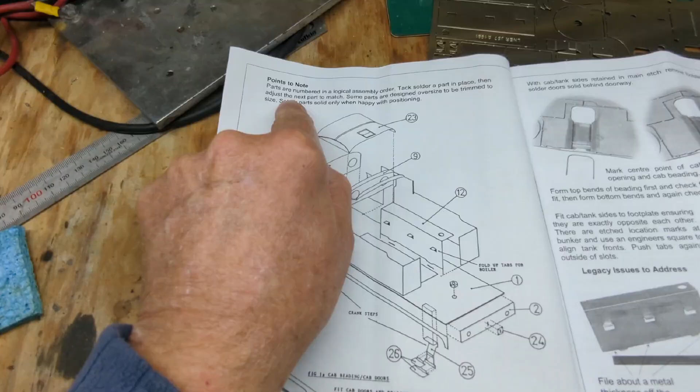Points to note: parts are numbered in logical order. Tack solder a part in place, then adjust the next part to match. Some parts are designed oversized to be trimmed to suit. Solder parts solid only when happy with positioning. Common sense. So they're like, you put 1, 2, 3, 4, 5, 6, and all that. So it's 1 till when you finish.

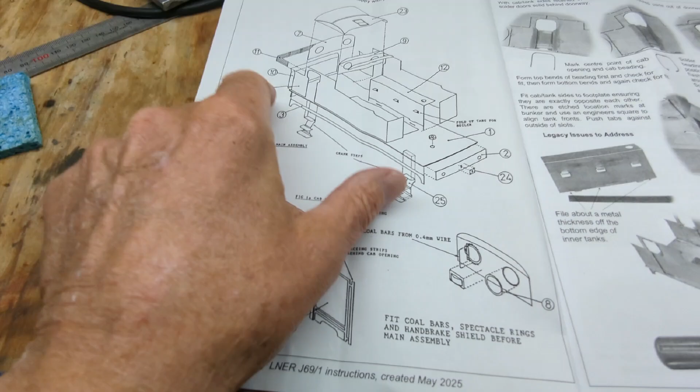Now, look, you've got part 1, which is a foot plate. Part 2 is 2 of those, the buffer beams. Part 3 is a valance. So even though it's only 3 parts, there's 5 of them, which I'm going to get out. You've got to put a captive nut in, front and back. But notice it jumps a bit, which is not a mistake. 10, 11, 7. Then all of a sudden you get to 23 and you think, where's all the rest of them? Well, you still follow it. This just shows you don't put the cab roof on now.

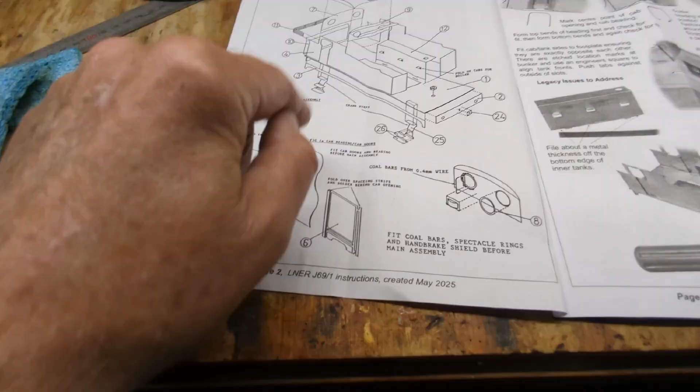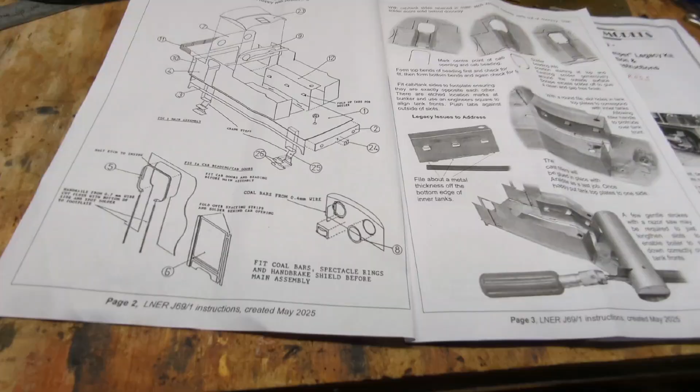So, for instance, part 4, then you go part 5. So this is put on in the flat, around the tank sides. 8. So it continues on. So just put them in the order you find them. That's the best way. I mean, if you look at the cab roof, and I've mentioned this before, I think this is a good touch. Where is it?

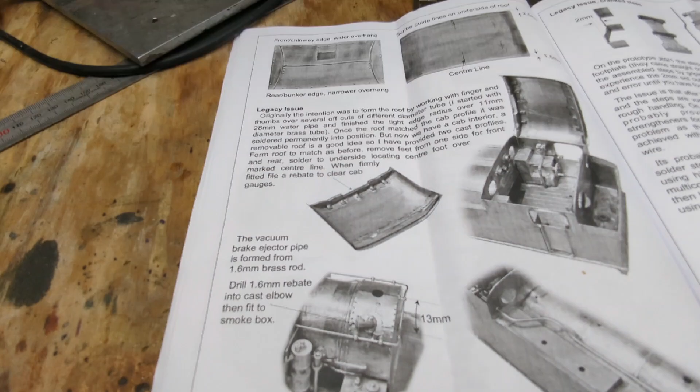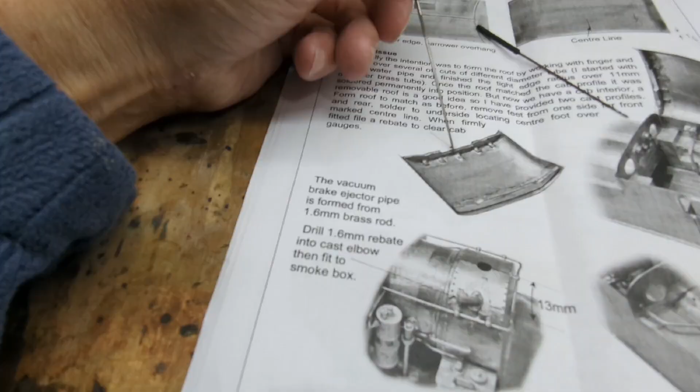Cab roofs on tank engines need to be removable, because if you solder it on, then you've got the problem: how do you paint the thing? So what Jim has done, and I reckon it's really good, let's get a pointer, he's provided 2 white metal formers to the shape of the cab roof, which will match here and there. They're soldered in on lines there.

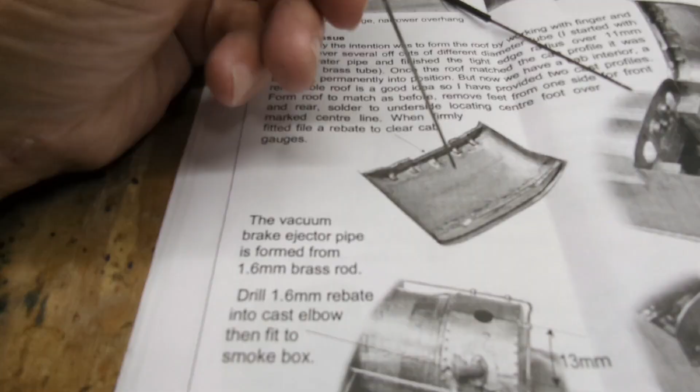So what happens is this should be a good press fit. So the cab should sit on, there should be no daylight. That's the plan. I really like that idea. Good one, Jim. Yeah, love it. So what I'm going to do today, I've got two of the frets out.

These parts will all be cut out and put back in the box. There's a foot plate, that's 1. Now, 2 and 3 are on the chassis. So we've got parts 2, that's the buffer beams, and we've got parts 3, which is, hang on, I've got to look now because I'm trying to do this. Where is it? There's part 3, and there's another part 3 here somewhere. I've just seen it. Hold on. Part there.

So I've got all of them. That's it. So here's the parts I need: the foot plate, the valances, 2 buffer beams, and 2 captive nuts. I need to clean all this up first and solder them in. There's the parts I've got out the middle of the foot plate, 2 steps, and the spectacle plates front and rear. So that's the frets I've got left. They can all go back in the box now.

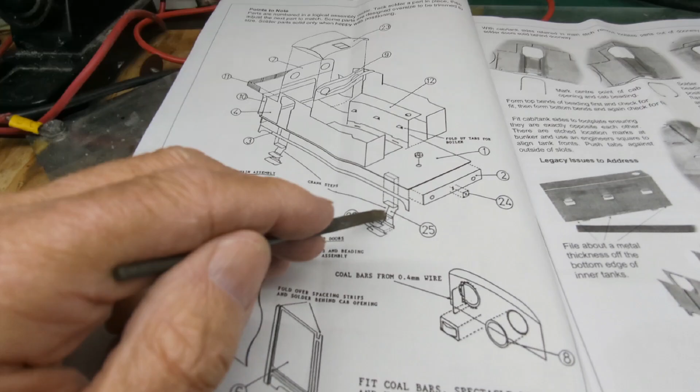Now, something to think about is this. Yeah, you could put these steps on. You could put them all on now. Big mistake. That's why he's got it 25 and 26. If you put steps on now, I can guarantee it, you're going to bend them, because steps are pretty fragile. Steps are probably one of the last things you want to put on a loco, because as soon as you put it down, you buckle them, they bend and they break.

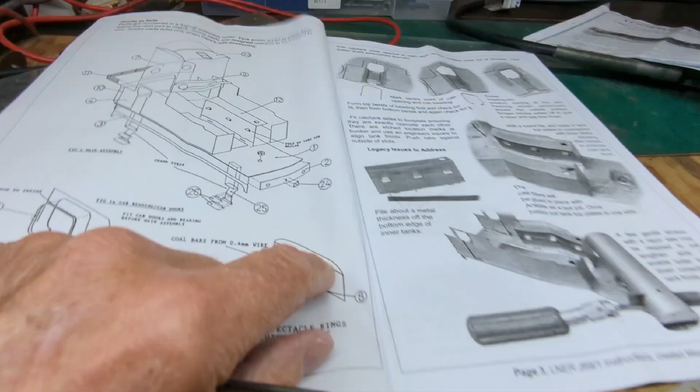If you haven't built a kit before, you wouldn't probably know this, but anyone who's built a kit, including me, will say, don't put them on. They're just in the way. So there you go. So I've got all these parts. So I've got to clean this up, solder on the captive nuts, and just add all this on. Now, the other thing I've got to make sure of, I think these are, this will go, you can see, I think the hook will go slightly towards the bottom. So you've got to be careful which way you put these on.

Now, there's various ways to cut frets out. You can get fret cutters, all sorts of manner of stuff. What I've got, these are old naff, cheap, nasty, horrible Chinese, well, it doesn't matter. They're not good needle files. You got them from a pound shop or a $2 shop. But you file them up, and they're good for a couple of things. One, they're good for scraping solder off and stuff like that. But basically what I do is I put it on here, put it down there, and tap with a hammer, and out comes the part.

Like everything, you want to make sure you don't distort parts. If you do, I've got these. This is from my old telephone days here in Australia. These are called duckbill pliers, and these are probably 60, 70 years old, maybe. Good quality stuff, made in Sweden. They're used for wiper contacts and relays. But I've kept hold of them, and they're great.

I'm in the laundry now, so I've got some Barkeeper's Friend. There's other products you can use. What I want to do, this is the foot plate. Obviously that's tarnished a bit, so I'm just going to clean this up. I think Vical has various products you can use. So I'm just going to clean this up using that and a toothbrush. Just to show you, I've just done that bit. It took me 30 seconds. I'm just going to do the whole lot now.

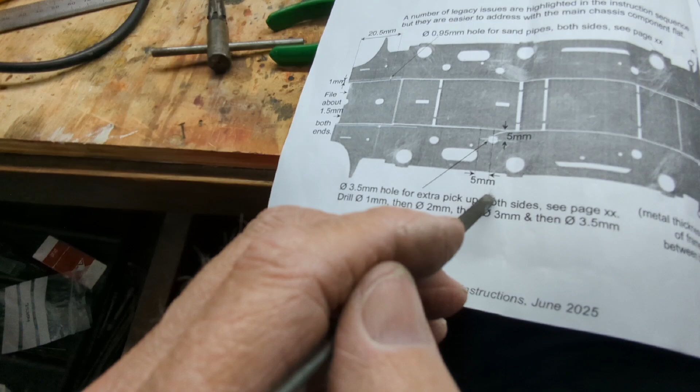So Jim says, come down from the mark 5 mil, and from this slot here 5 mil. So just draw one that way and then that way, and where they cross, just punch it and then drill it out. As I said, this was a legacy kit, and for some reason, I don't know why, Jim never put this in the first place. But anyway, it's going in now.

I've still got a filing to do. There's the 4 holes for the sanders. I've marked up and punched, so it's 5 mil in from there, 5 mil in from there. So I drew a line across, and then 5 mil down from the top of the frame, and I've just punched that. I'm not going to drill those out yet until I get the wheels, which will be here this week. So at the moment, all I've got to do is do the filing at the ends, as Jim says.

What else was I going to say? Now, I haven't opened up this yet. The other thing is, this will probably be oval, and I'll tell you why. Before I started this, if you draw a line from the bottom of that to the bottom of that, you will find this bearing ever so slightly higher. And the idea is, you've really got an 040, and the middle wheel doesn't touch the rail, ever so slightly, I should say.

Jim suggests ovaling that out, so that the bearing can move down a bit. Otherwise, if it's all level and you've got some uneven track, you could get one wheel come off the track, which is the advantage of springing the chassis and putting Slater's cast horn blocks in, and guides and springs. But I'm not going to do that here, so I'm just going to build it as is.

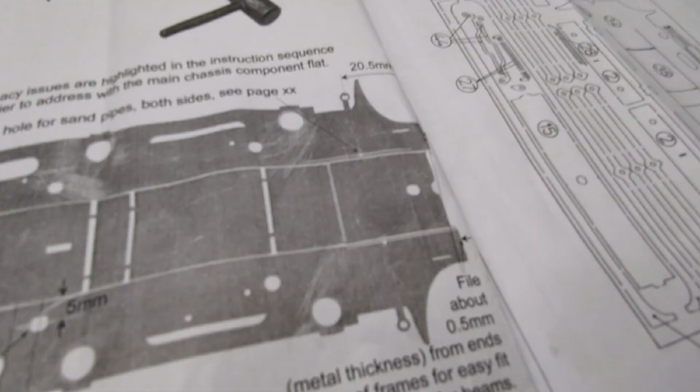Also, one end, this end, Jim says to take about 0.5mm off, just so it allows it to fit between the buffer beams without fouling anything. So that's what I'm going to do now.

So as you can see, I've filed down about 1.5mm, as Jim suggests. That is so that pipes going over the top of the buffer beam don't foul it.

I've got to do the same here. I've scribed that - look, this doesn't have to be 100% accurate or good. I mean, you're not going to see this, but anyway, just take your time, be careful. I don't know if you can see this, I've just scribed. You can see the scribe mark there and the scribe mark there.

Jim says to take that off, the thickness off - the thickness of the frame. So I'll just set my dividers to the thickness of the frame, scribe it, and I'm just going to file it down. This is just so this fits in a bit easier.

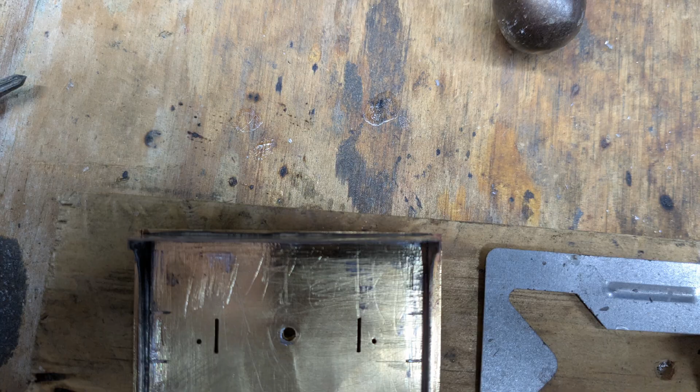In making this, when you look at the photo before, I've noticed the buffer beam has an overhang, which there always is - oh, sorry. But it's not parallel, it sticks out at this end. And I thought, what have I done?

Anyway, I measured the valances, just the top here, where the bottom of the valence is, and I've noticed that - let's see if I can do it - one end is a bit thicker. I spoke to Jim about it, and he's just noticed it too. Sorry about that. He says, my word, it is out a bit.

So he's going to put a note in the instructions about that. As I said, this kit hasn't been released yet. So what I'm going to do - look, to be honest, you wouldn't even know. If you didn't look, you wouldn't know.

But what I'm going to do, I'm just going to unsolder a piece of that there, the buffer beam. Going to file that down slightly and put it back on. Problem solved. Well, this will be the end of part 2.

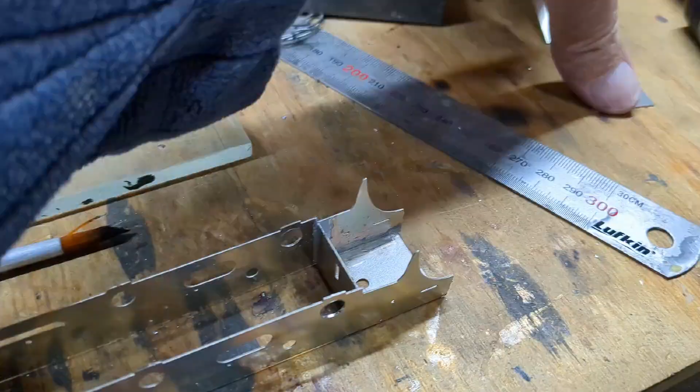So I've made the basic frames up. There's still, if I want, a couple of spacers to put in, I haven't worked out yet where they're going to go. This is all good. I did fix up the end, so I just took off one end, a bit of... I just filed that piece down and resoldered it on.

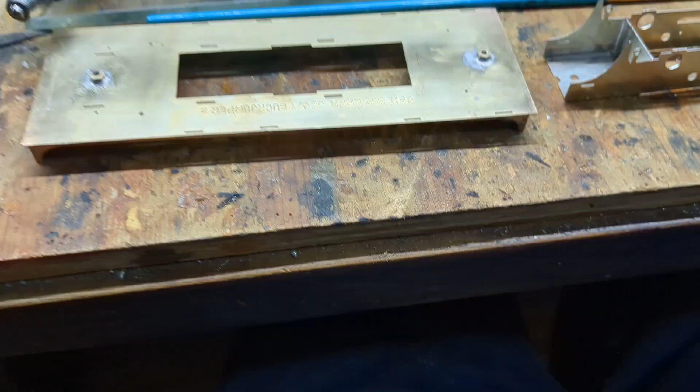Jim knows about it, so he'll include that in the instructions. I guess the trick is always check that the valances are the same length. My next thing I'm going to work on is make up the coupling rods. Now I know, according to Jim, there is a legacy issue with that - they've got to be fixed, the holes are slightly in the wrong place. That's another story, but it will be fixed up, and I'm going to show you how to do it.

So I've put these captive nuts on. Just hold on, I'm going to fix it. So I've fitted the basic frames to the basic foot plate, screwed both ends onto these captive nuts here. So that's the end of it. That's done.